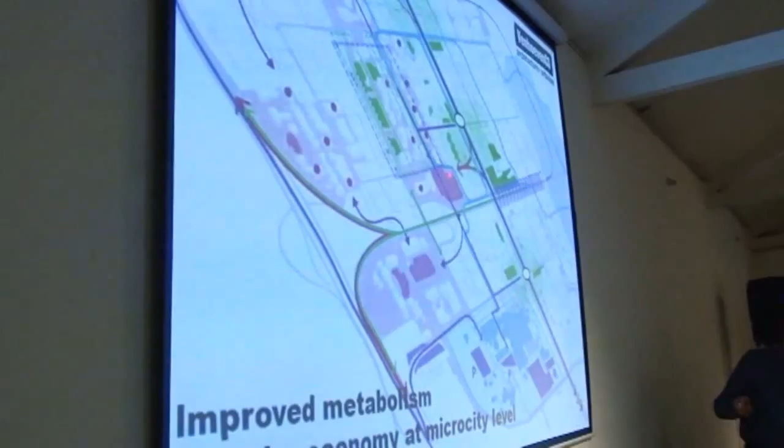All these things which I mention here, I checked it carefully with all kinds of experts. You can organize this at the scale of these 10 to 200,000 people. Technology is available, the business cases are solid. So that is to create a smart microcity in the circular economy, where we use all the spillovers and the crossovers and the cascading of flows in these areas.

Another aspect which we want to avoid, because everybody comes by car, and we have this large-scale event area - this is a mega cinema, this is a soccer stadium of Ajax, and also it's a flex stadium, so you can use it for music events. That means that 50,000 people will come within 1 hour - this is not what you want.

So we propose to use all these small businesses like pop-up shops and bars to make the area more attractive, to get people to come 2 hours earlier. And that way we have a much smaller peak load in the public transport system, so more people can use the train and the metro to come here. And the local economy, with a poor neighborhood on this side, can make money on these small shops.

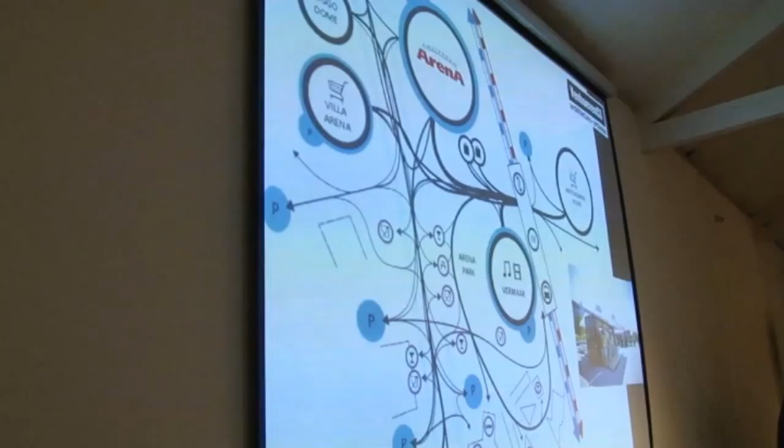So this is the type of development we found out here.

Part of the strategy here is to improve logistics in the city. Normally, also here in Mumbai, a producer goes with a big truck into the city and then delivers all the Coca-Colas to one shop after the other. And currently in Europe, some cities are developing this urban logistics system, where you have all these multimodal trucks, ships, trains, etc., bringing goods to the logistics centers.

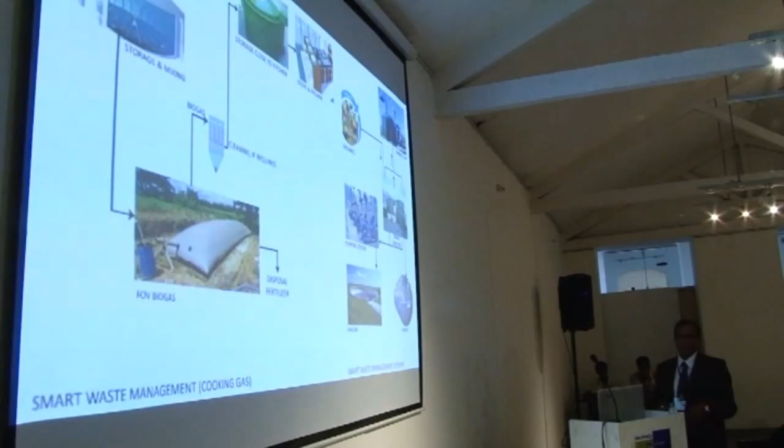This brings us to ICT. We've talked about all aspects of the smart micro city - waste, water, security, transportation, assets and so on. All these need to interact through a controller or control mechanism smart enough to understand the interconnection between energy, water, people, transportation, waste and so on.

That's what ICT is about. It's not the only thing that makes a city smart, but it adds to its smartness. This is conceptually about quality of life. My friend Ismail was asking about the poorest of the poor - they can't go live in Lavasa, they want to stay outside. Yes, all those problems exist, but my focus is on power. Tom has added great clarity to that aspect.

We'll jump to this slide because it's very important - what is a smart grid? It's an electrical grid that information and communication technology helps make smarter. It was there all along - Edison perfected it, and if you brought Edison back today he'd still recognize it. But if you brought Graham Bell and told him about ICT, he'd be amazed.

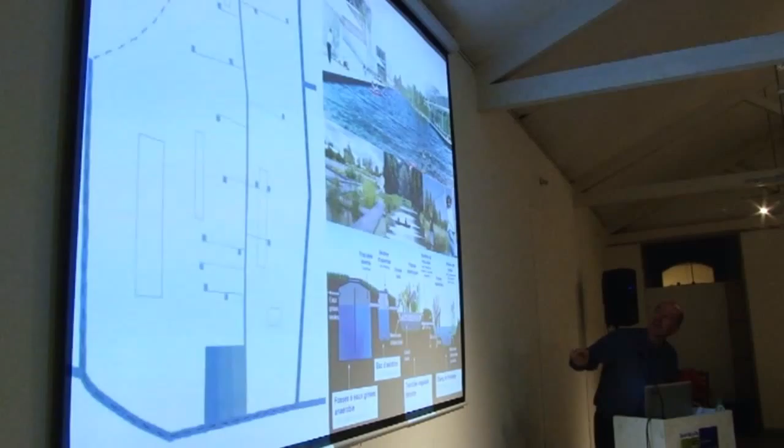And here you see that you can have a canoe on the pond. So there are lots of things you can also do with it, like playing children and all these things.

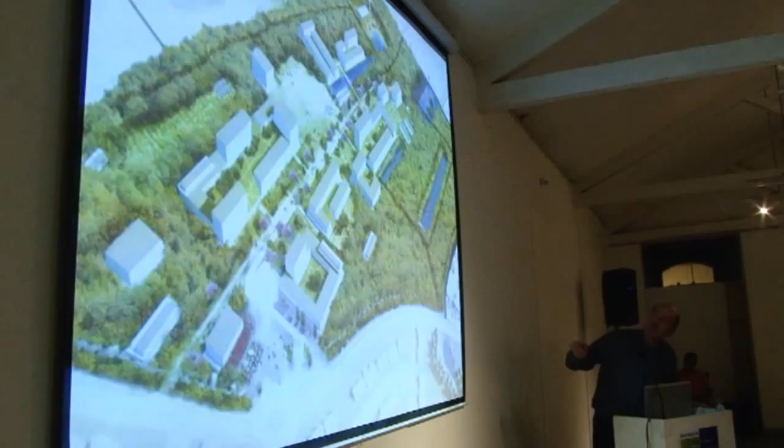This is how you can phase it, because you don't sell all the houses at one go. So you have 4 separate parts which you can develop separately, and each part has its own parking solution in those large blocks. What you also see, which I forgot to tell, is that we played with the size of the blocks. This is a very big block, this is a medium block. But we also have one single house.

And this is collectively owned, and you can rent it if your parents come. If you want to have a small room, or if you want to write a book for a month, then you can rent it and be in the middle of nature.

So you can see that smart cities are actually great fun.

Here you see the parking solutions with cars parked inside the blocks, so that you really have attractive houses also on the ground level next to the public space. So you don't have just the first 2 stories with cars and then some people up there, but immediately eye contact and hi, I'm back.

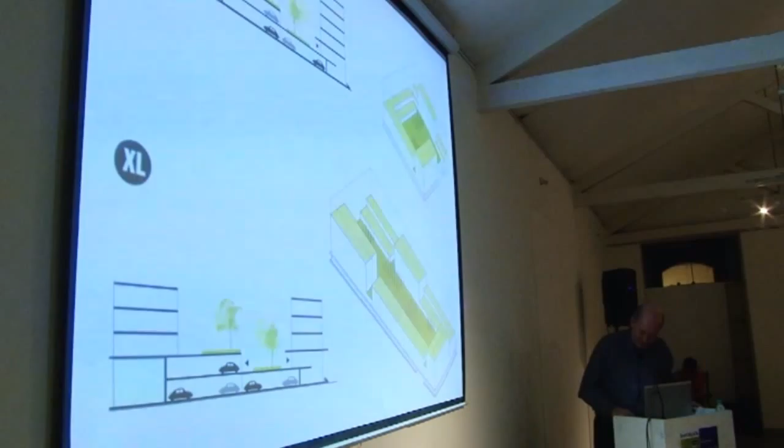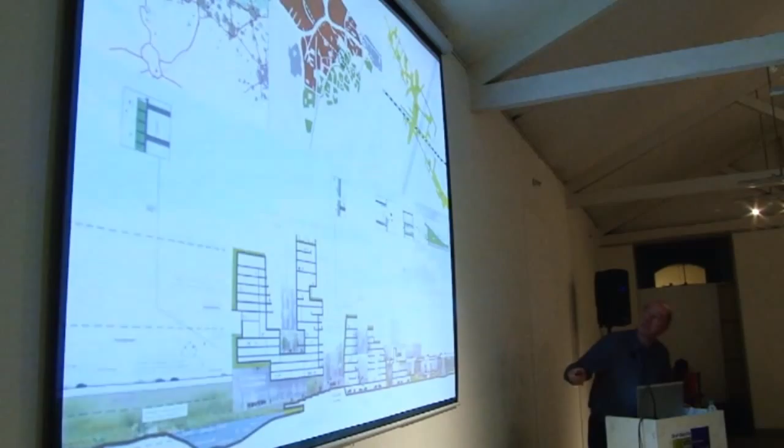In the beginning I told you that each township, each smart city, smart microcity, also needs facilities, not just homes. And also such a township needs jobs, because otherwise if people have to commute for 2 hours in the morning and 2 hours in the afternoon, that's not a smart solution. So you want to have everything together.

And this means hospital, schools, cultural facilities, everything, and also old people's homes. This is a project for the city of Leiden, which contains all these facilities. There are... I'll show the next picture.

This is the total block, one big mass. These are also some apartment blocks, part of the plan. Parking is underneath this block. And here you see the program.

These are three primary schools. This one, 2, and this is one bigger one. There is a health center, health and mother and child center, with nurses, with general practitioners, but also specialized in logopedia, and all kinds of things, mental illnesses.

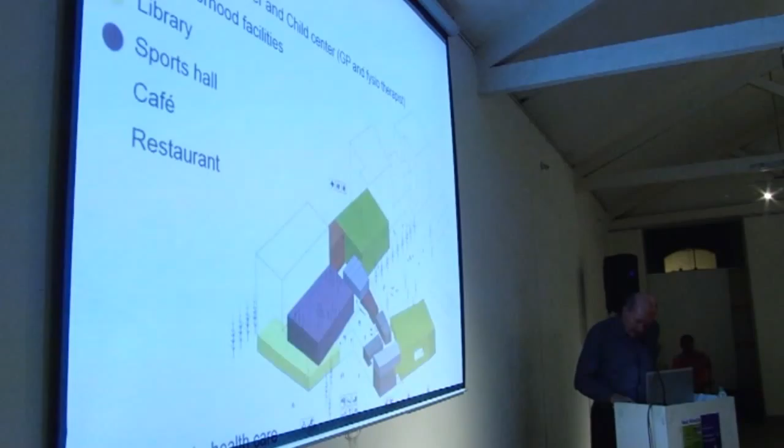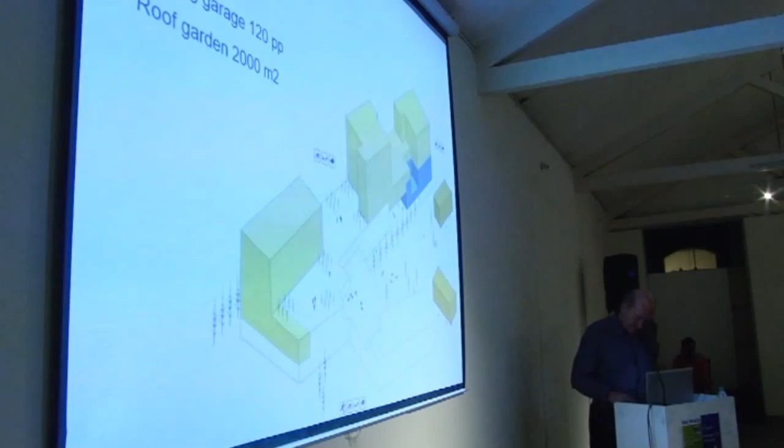And the rest is like housing, and this part is for people, old age people with dementia, and these are starter homes. The range of houses is between middle class and poorer class. In the Netherlands you cannot say poor because we don't have that, but... and this is the project.

It's built in the middle of a poor neighborhood, with many different nationalities and immigrants living there. It's the poorest neighborhood of this city, and this project is developed as an investment in the quality of life, creating all the facilities together to create a magnetic point, a sort of acupuncture, to recreate the community of the neighborhood.

May I ask a question? Did the original population of that area stay there? Are they now benefiting from that project, or will they move out? No, it's only a small part which will be densified with new homes. But basically, most of the people stay there.

Here you can see our project, because it's also a symbol of this open and mixed society. Here is the library, this is the sports hall, this is the soccer court on the roof, this is the entrance to the building, these are the apartments. So you really have everything together in one blink of the eye.

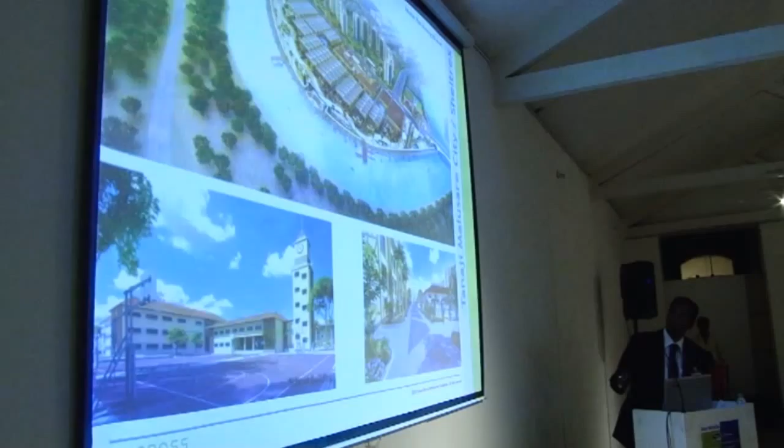What you see here is a community which, as per the income class, stays in shorter, taller buildings in various stages, but has a great quality of life. There is a riverside promenade, a whole array of public amenities, and as the project goes into larger economic categories, of course you could have taller buildings.

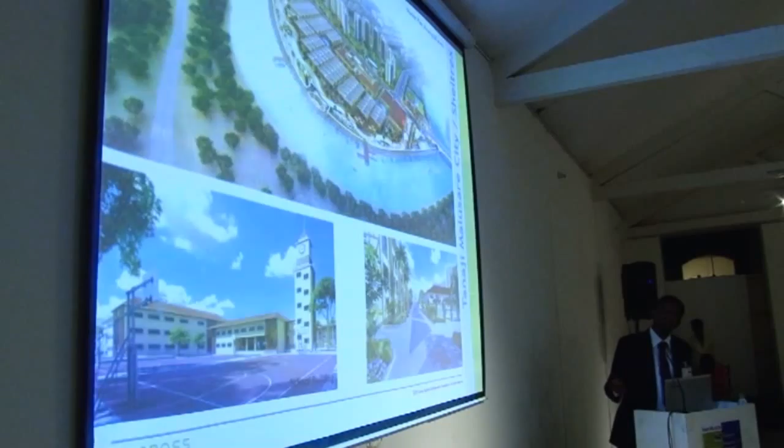This is a school we are building for the students. This is a club with retail and multiple functions together. These are the further phases that will come in the future.

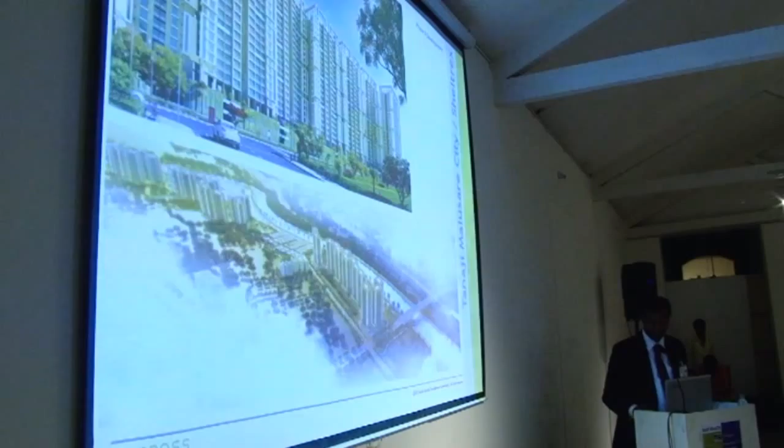A community of 5,000 houses is being built outside of Mumbai. The project is under various stages of execution and construction today, and a number of aspects of smart microcities have been integrated here.

There is wide use of RFID. For example, all of the vehicles and all of the door knobs are connected to a grid. So we could start to integrate applications where, based on your occupancy, the electricity powering the light could be adjusted, and you could save money. All the water meters and current meters are connected to your account, where the money can be given directly to it.

There are a lot of bicycling tracks in the township. So there's a lot of smart municipal infrastructure.

The same organization with whom we are doing another smart city development in Chennai. It's at an earlier stage, but again using the same principles of creating green lungs and connecting multiple functions together.

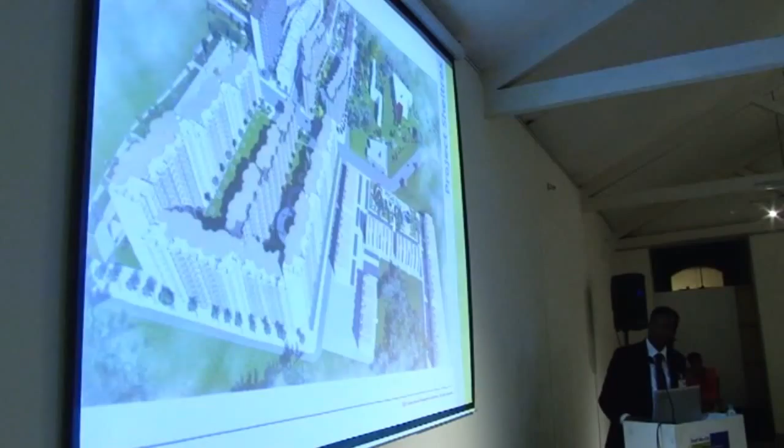These are glimpses of the kind of quality of life for a very affordable housing category. The houses range from 300 square foot to 600 square foot, from 15 lakhs to 30 lakhs.

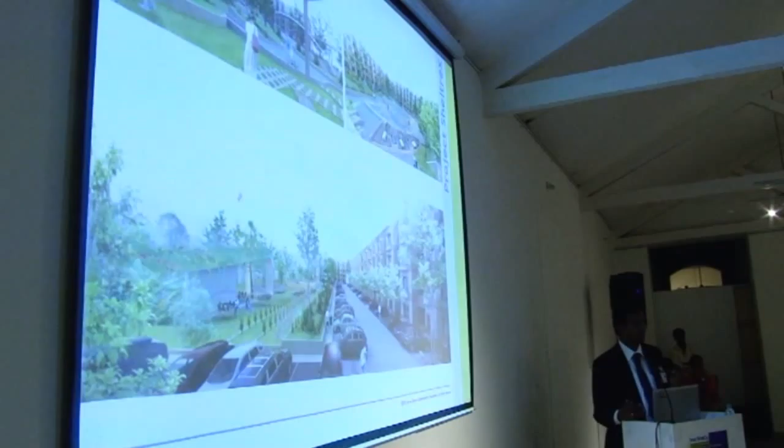This is a project which is almost on the verge of completion. It's called Xrbia, at Pune, using the same principles.

So these are the kind of projects that we are trying to come up with at various parts of India, using the principles that Tom has elucidated.